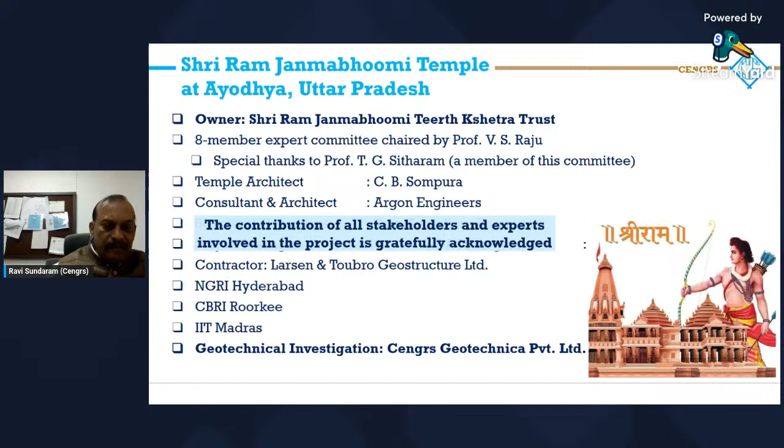So all the stakeholders, the experts, and others involved in the project, I gratefully acknowledge their contributions.

Just a brief introduction on what this presentation will include: the history, the legal cases, and the temple as planned, and the architectural principles involved here. The geotechnical investigations and geophysical investigations—that's the main thrust of this presentation. I'll be talking primarily about this.

It will also contain the test results, what tests were done and what the results were, the geotechnical design profile, the liquefaction analysis, the expected behavior of the temple during earthquakes, various foundation alternatives which were evaluated, and what was the final foundation system selected, and why we opted for this kind of foundation system.

We'll talk about the excavation, the engineered fill, the quality assurance, and how the structure was assembled. I will also, towards the end, speak a little bit about the archaeological findings, and then we conclude.

Brief history of the project site, the Ram Janmabhoomi Babri Masjid site: the site of the Ram Janmabhoomi land, the associated court cases, and the final selection of the site for the Shri Ram temple. This is a complex and deeply intertwined narrative of religion, politics, culture, and Indian law.

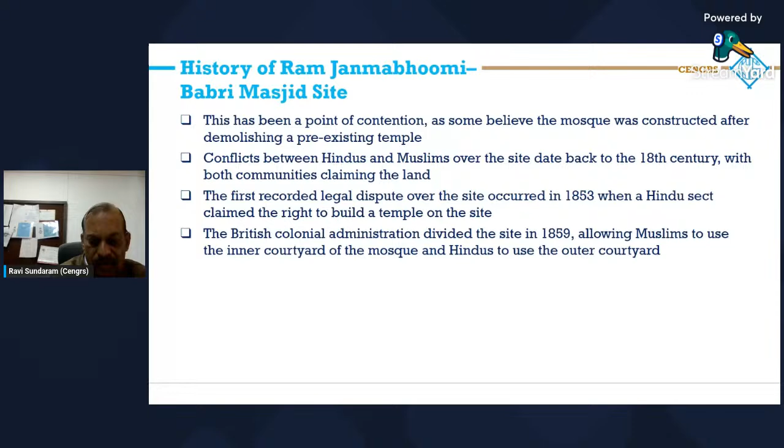Now, the court cases and the developments that took place: in 1949-50, idols of Lord Ram were placed inside the mosque, leading to both Hindu and Muslim protests. The government declared the site as disputed, and locked the gates, allowing worship only from outside. In 1950, Gopal Singh Visharad filed a suit seeking rights to worship the idols.

Then there was this Mahant Paramahansa Ramachandra Das. He filed another suit for continuation of puja and for removal of the idols.

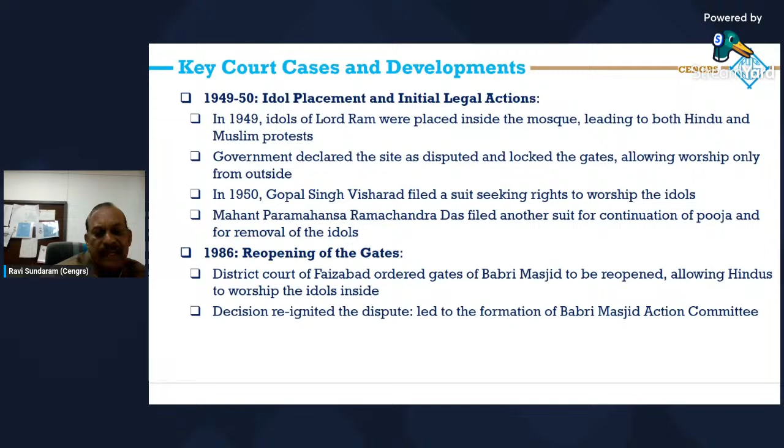In 1986, the whole thing was split open with the reopening of the gates. District Court of Faizabad ordered the gates of Babri Masjid to be opened, allowing Hindus to worship the idols inside. The decision reignited the dispute, and led to the formation of the Babri Masjid Action Committee.

In 1989, the Vishwa Hindu Parishad's activities also increased and the legal battles intensified. This led to a nationwide movement to build a temple at this site.

Another suit was filed on behalf of Lord Ram, basically Ram Virajman, by a VHP-backed organization seeking title to the disputed land.

In 1992, on December 6th, a large crowd of activists collected there. A big rally took place by VHP and BJP. They demolished the Babri Masjid.

This led to widespread communal riots across India, resulting in the deaths of thousands of people. Post-demolition, there were legal proceedings, numerous cases, including criminal charges against political leaders and activists. The site remained disputed, and the courts took control of the land.

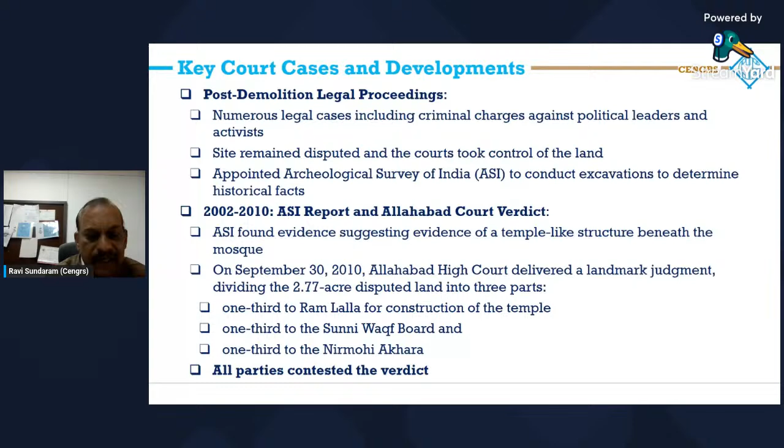So then the matter went to the Supreme Court, and you are all aware that in 2019, on November 19th, the Supreme Court of India delivered its final judgment in the matter.

The court unanimously awarded the entire disputed land to the deity Ram Lalla, represented by the Hindu parties, for construction of the temple. The court also directed the government to provide an alternative 5-acre land to the Sunni Waqf Board for construction of the mosque.

So with this, all the disputes were over and the activities related to the construction of the Shri Ram Temple started. So the Shri Ram Janmabhoomi Teerth Kshetra Trust was established to oversee the construction of the temple. The foundation stone for the temple was laid...

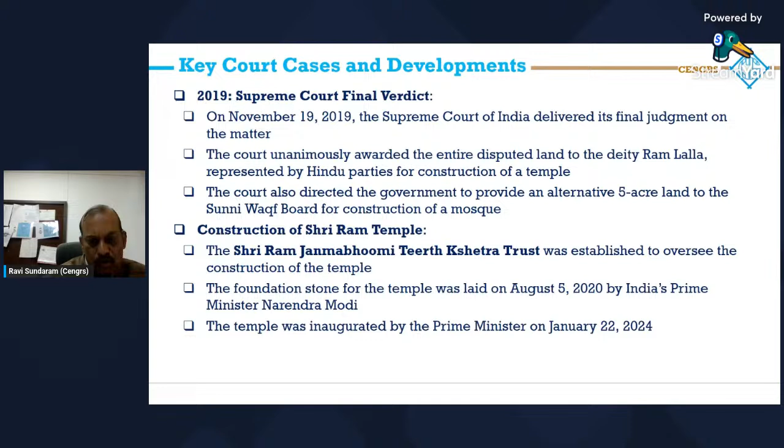...on August 5th by the Prime Minister, and then it was inaugurated again by the Prime Minister on January 22nd, 2024, that is last year.

So now we go to what was planned. Now with all the history and the court cases behind us, I'd like to explain what was planned, how it was executed, the engineering behind the structure, how it got constructed, and what we see today.

So the temple is basically planned as a masonry load-bearing structure. It is planned to last for nearly 1,000 years. The temple architect required that steel shall not be used in the construction, as per the ancient Vastu and Shilpa Shastras of temple construction. Some religious scriptures also advise that temple structures be constructed without using steel, for various practical reasons.

Hindu temple architecture, based on ancient texts, described the various principles of design, layout, measurement, ground preparation, and spatial geometry. So the design is rooted in the classical principles of Indian architecture, drawing from the Nagara style, which is prominent in most of North India.

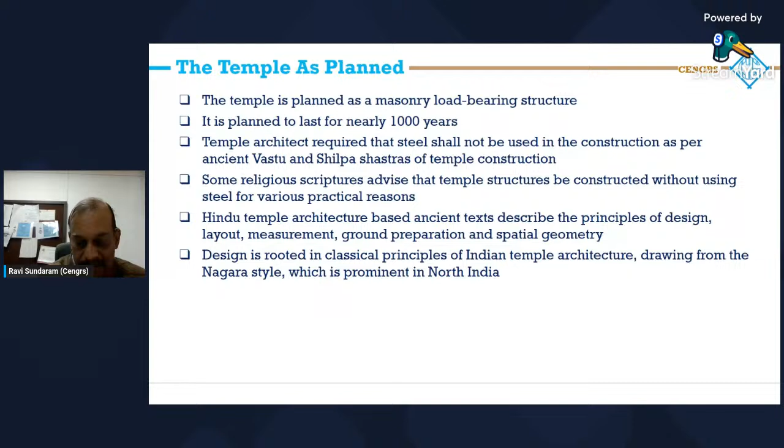So let's look at Ayodhya, situated on the banks of the river Sarayu, which is also called Ghagra River. It is the headquarters of Ayodhya district. Earlier it was part of the Faizabad district. Now it has been split into two districts, with Ayodhya being made a new district. So that is where the temple is located in Ayodhya.

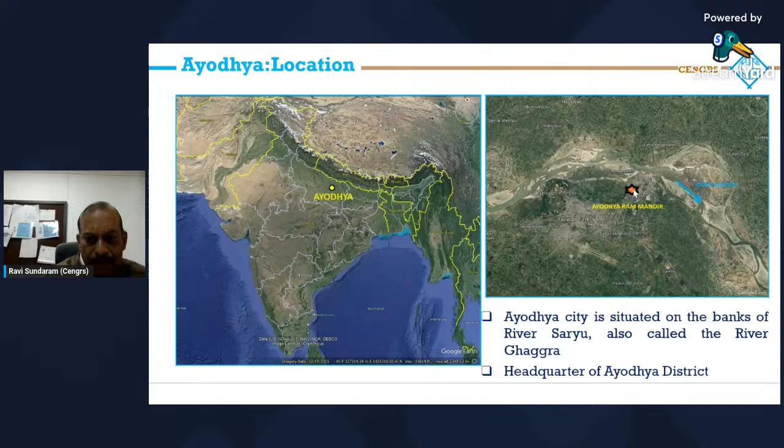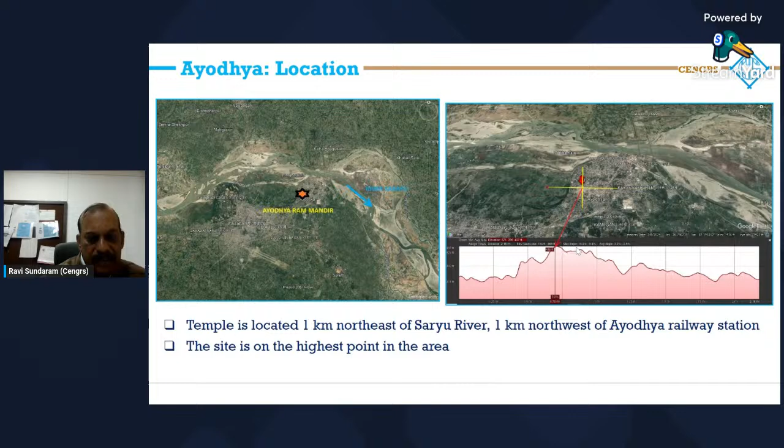It is about 1 kilometer northeast of the Sarayu River, and also 1 kilometer northwest of Ayodhya railway station. As you can see here, the temple site is on the highest point in the area.

So let's look at this temple's details. The plot covers nearly 67.7 acres. The main temple is built over 2.77 acres. The built dimensions are 115.8 meters by 76.2 meters, that is 380 by 250 feet. The development here includes the Garbhagriha, which is the most sacred part of the temple, which has the statue of Ram Lalla. The highest dome is 161 feet.

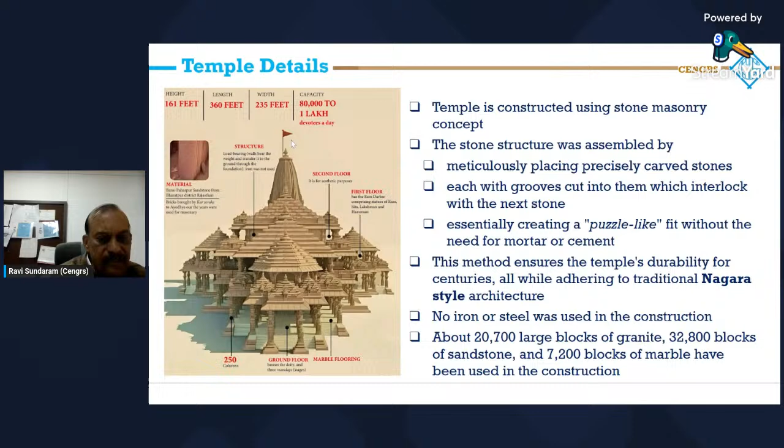So you can see here on the ground floor you have the main statue. On the first floor there is a Ram Darbar, and then there is a second floor. So this is how the structure looks like.

For protection against ground moisture, a 21 feet high plinth was constructed with granite. The foundation is flexible and can accommodate some movement during earthquakes. The roofs and pillars are stacked in such a way that their centers of gravity are perfectly aligned, so it's basically the enormous weight of the structure which holds it in place.

Traditional construction methods, materials, and age-old building practices have been used, but of course modern technology has also been used for the construction activity. Steel has not been used for construction. Stone has a longer lifespan and better durability in comparison to reinforced concrete, which is why concrete was not used. Also, stone shall enhance the structure's earthquake resistance.

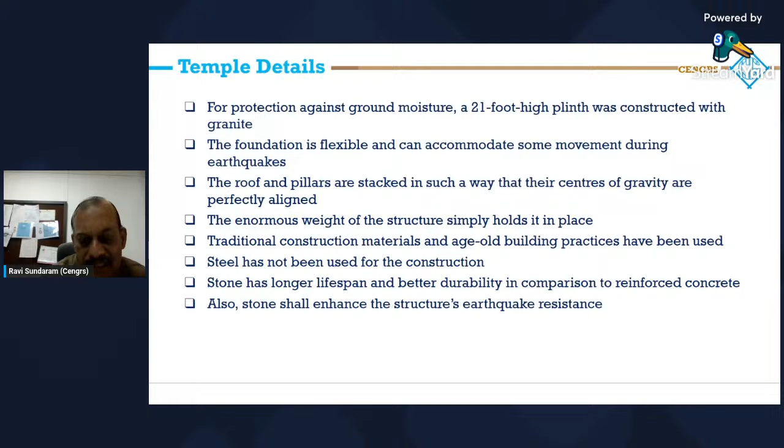Now we go into the geology and geomorphology of the area. This is the temple relative to the Saryu River, within the Indo-Gangetic alluvium. The whole area is part of the Indo-Gangetic alluvium. As you know, the Saryu goes and joins the Ganga, so it is located in the floodplains of the Saryu River. Basically, Faizabad district and Ayodhya district are all part of the central Gangetic plains.

So a thick pile of alluvial deposits of quaternary age, maybe between 1 million years and 10 to 15,000 years - this is the period during which the deposition took place. The alluvium consists of unconsolidated sediments of clay, silt, kankar, and sand, all recent deposits less than 1 million years old.

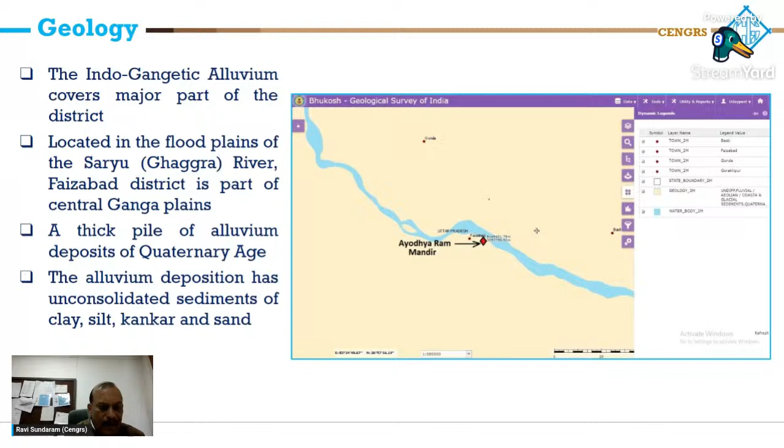The Saryu River has a large floodplain with several mid-channel bars. The channels are meandering, and multiple scars are present within the floodplain. The temple, of course, is located at the highest point here. Adjacent to the temple, there's a cut-off bank and an abandoned meander of the Saryu River. There's also a natural depression, or paleo channel as it is called, near the temple site.

Now I go briefly into the geophysical investigations. Will not take too much time on the geophysical. We'll go more into the geotechnical aspects.

Geophysical investigations conducted include ground penetrating radar, electrical resistivity tomography, MASW tests, and micro tremor study. NGRI had done most of these studies, and CBRI had also done some studies.

The ground penetrating radar identified a buried wall right at the location of the garbhagriha. Then these are all these various soil depositions in the temple zone. You can see here that this top layer is where there were a lot of artifacts found.

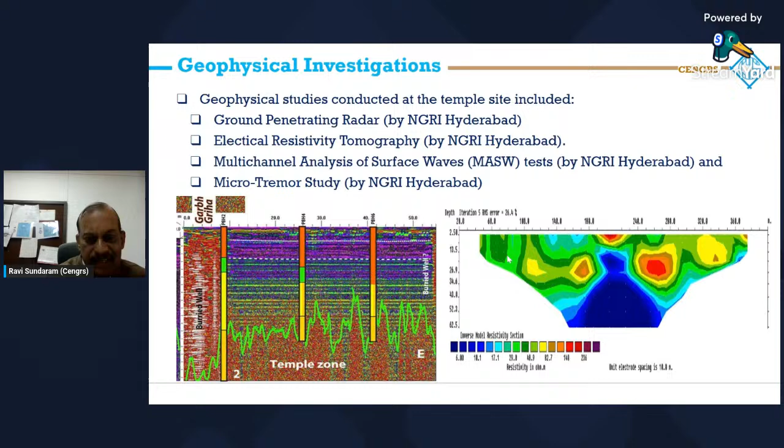Similarly, this is the electrical resistivity tomography. All these different colors which you see here are locations where they did find a lot of some of the artifacts.

The MASW study basically found the top layer of dumped material with mixture of man-made materials. There was a water saturated zone here, and then there was the sands of different compaction levels. So the shear wave velocities measured here were used to determine how hard the soils are, and also a paleo channel was identified.

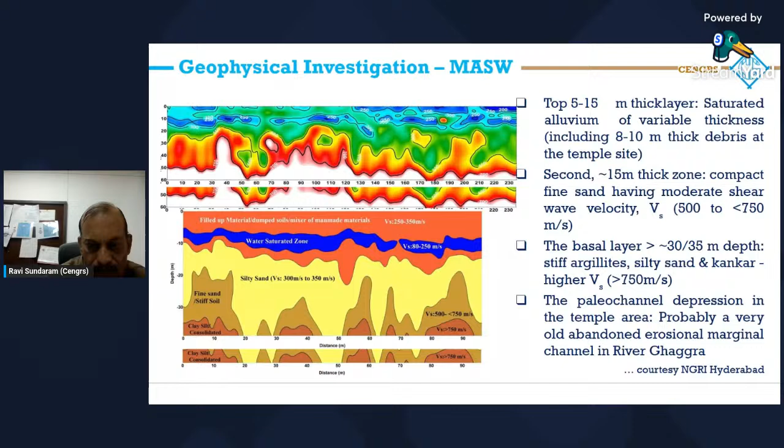So all this is mostly courtesy NGRI Hyderabad. Now I move on to the geotechnical investigation.

As some of you may be aware, the purpose of the investigation is to identify the stratigraphy or the soil conditions to substantial depth below the ground, particularly the garbhagriha, the various mandaps and other structures. Get an assessment of the soil resistance using a standard penetration test, determine the engineering properties of the soil, perform the soil bearing capacity and settlement analysis, evaluate the potential for liquefaction during earthquakes, and provide the engineering data for assessing the various possible foundation schemes so that you can select the appropriate one.

So the locations of the investigation are selected dependent on the structural loading. The garbhagriha is the tallest dome with the heaviest loads, so maximum investigation was done there. Similarly, for the various mandaps, depending on the loading, the scope was decided. So that's a plan of the investigation, I'll go more into this.

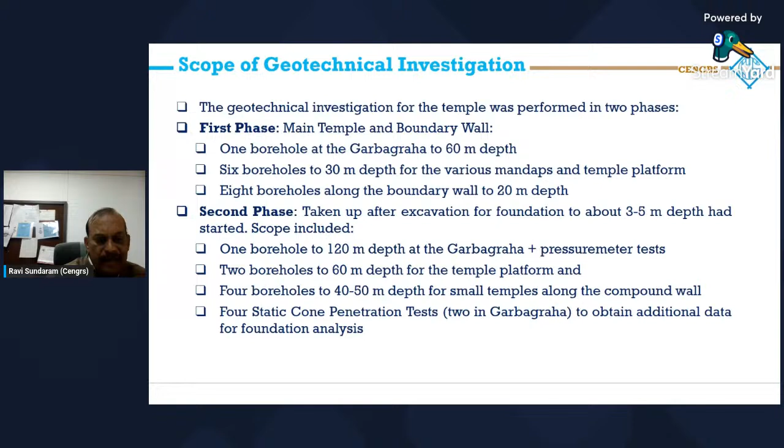So Ayodhya, as I told you earlier, is in the Indo-Gangetic alluvium. Now the superficial fill extends to 7 to 8 meter depth. Then below that you have sand, silty sand with minor layers of sandy silt. The fill contains basically silty sand with stones, brickbats, and all that. And at deeper depths, a few small pieces of pottery were also encountered.

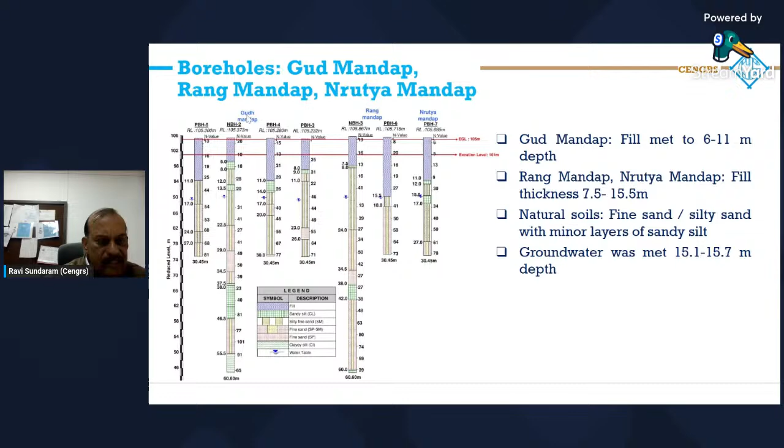Now this is the Gud-Mandap, Rang-Mandap, and the Nritya-Mandap. Here also we had boreholes down to a maximum 60 meter depth. The stratigraphy is similar, with fill thickness ranging from 7.5 to 15 meters. You can see here the fill thickness was more. Again, groundwater was at 15.1 to 15.7 meter depth.

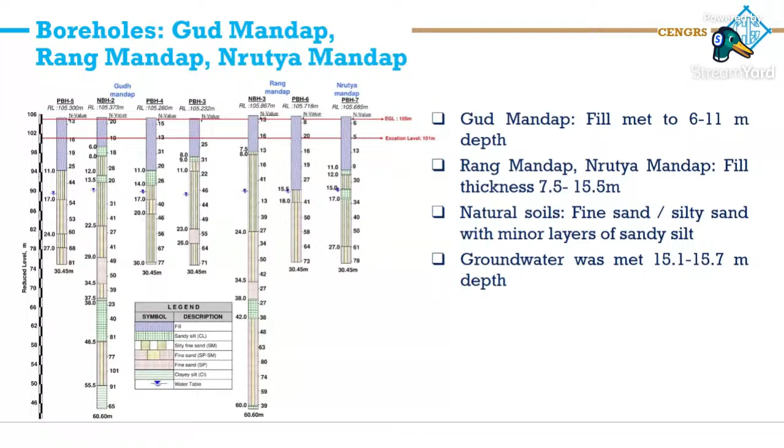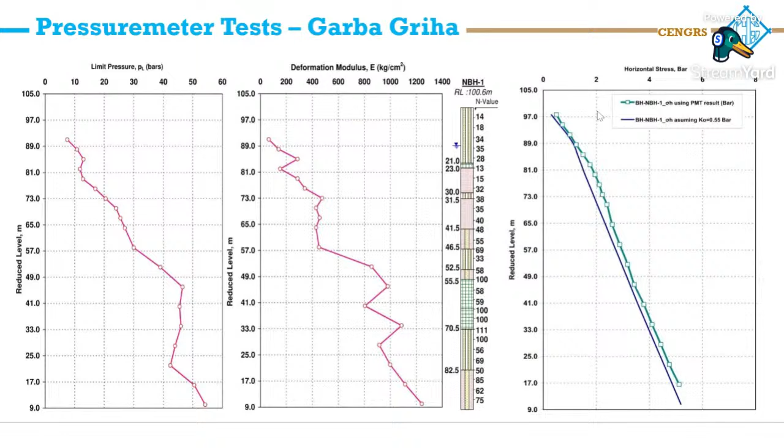So this is the pressure meter test being done at Ayodhya. The pressure meter gives you pressure versus volume change. This is the limit pressure and deformation modulus profile with depth, and you can see the horizontal stress with depth. These are results of the static cone penetration tests.

This was done from the excavated level here, at the Garbhagriha. The cone resistance gives you an indication of how compact the soil is. The test was done to about 40 meter depth. There was the fill and then the sand, as interpreted from this friction ratio and the cone tip resistance.

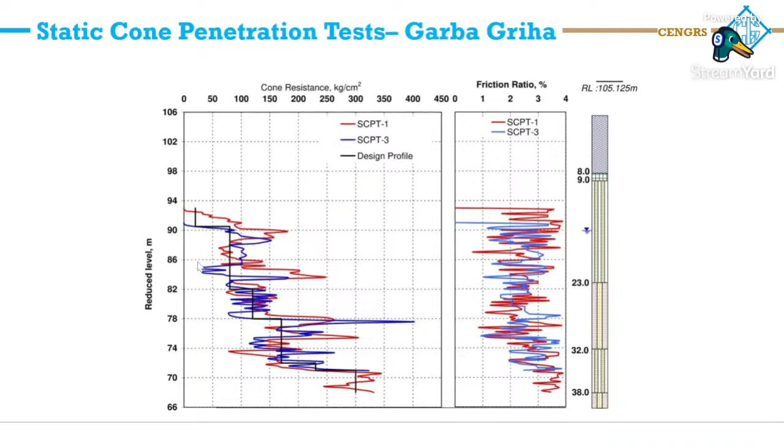At the Garbhagriha, we can interpret various engineering properties from the cone penetration tests. We used Robertson's correlations to assess the SPT values, bulk density, and various other parameters.

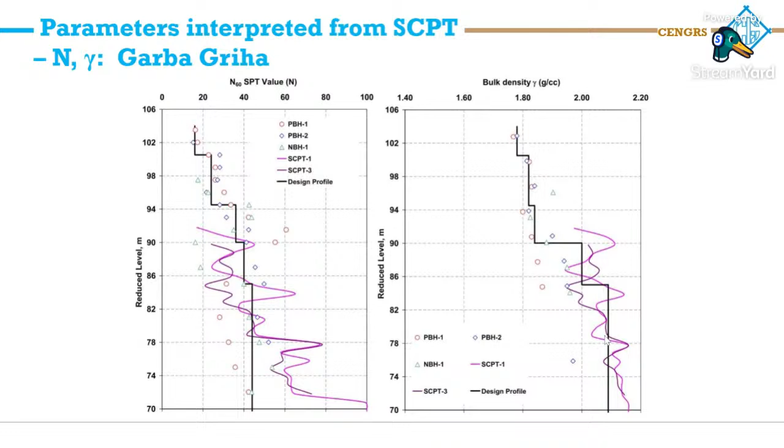So you can see what these show you: the measured values of SPT N in the boreholes, and these are the interpreted values from the cone penetration data, and this one is the design profile used for our analysis. Same way for the density of the soil, these symbols show what was measured in the boreholes, and we have the cone data, the interpreted density values, and the design profile.

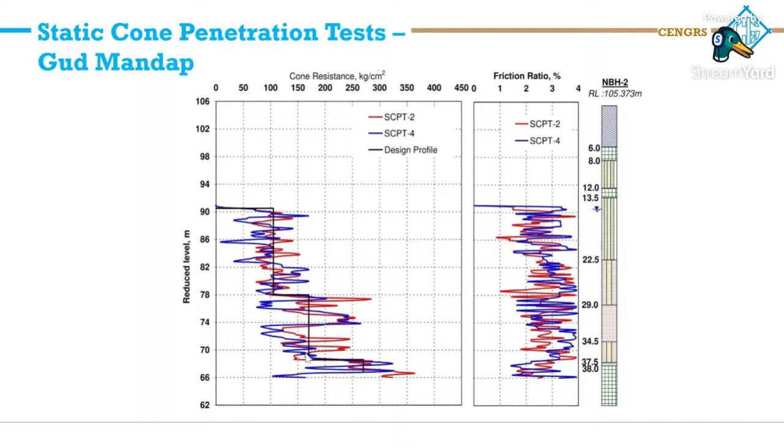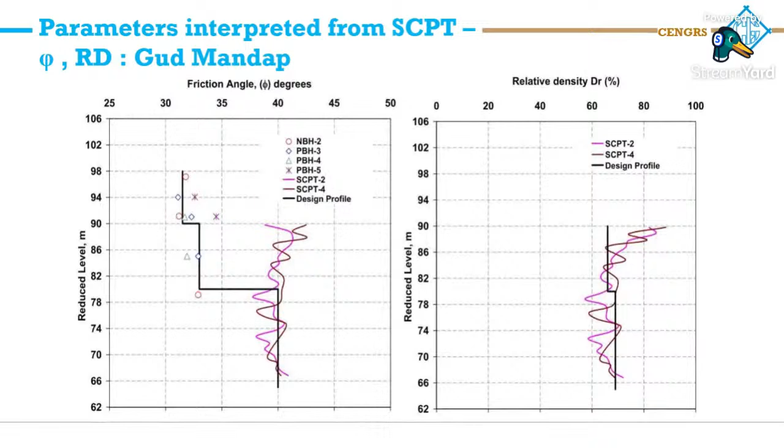We also measured the angle of internal friction and the relative density interpreted from the cone data. This is the same kind of correlation for the Gud-Mandap. Here also we had done cone penetration tests, and you can see there was a 6 meter fill, then sand below, and around 38 meters there was a silt layer. This is the design profile of QC, cone tip resistance, and various engineering parameters from Robertson's correlations: the SPT values, bulk density, friction angle, and relative density.

Modulus of elasticity is another very important parameter, and a little difficult to assess. The best correlations are available from CPT and pressure meter tests. Looking at all these, the design profile for modulus of elasticity has been selected for the different areas, and using all this, the geotechnical design profile has been selected.

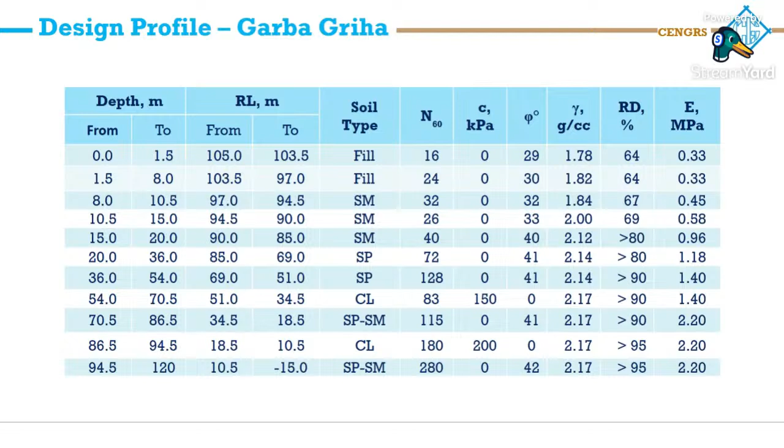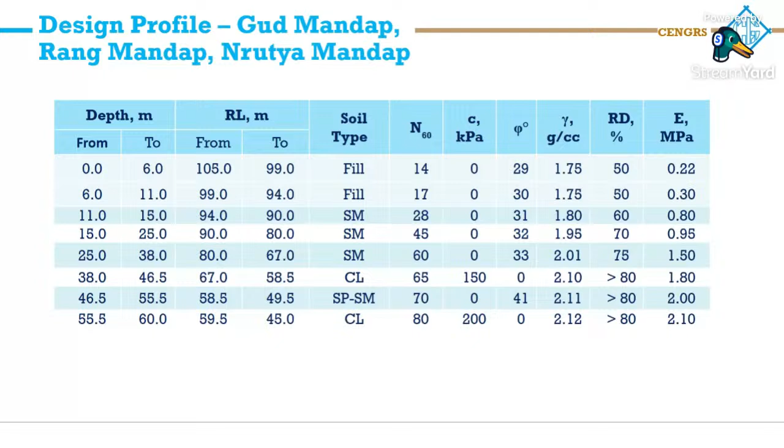So this is the geotechnical design profile for one area, and this is the geotechnical design profile for the others. You can see the various parameters which have been selected for the foundation analysis.

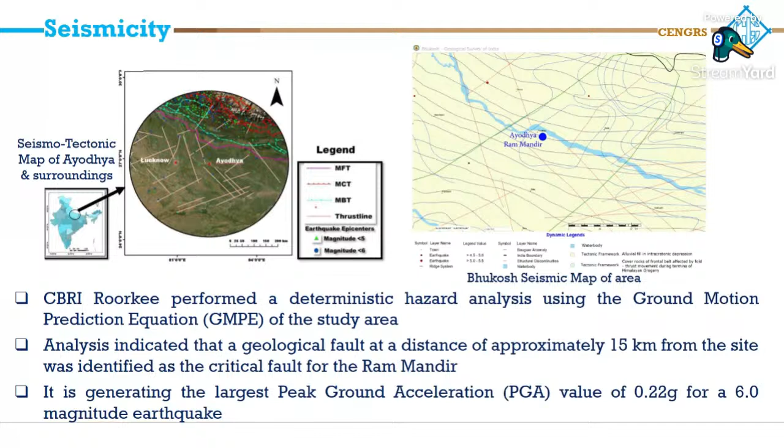The analysis indicated that a geological fault at a distance of approximately 15 kilometers from the site is the critical fault for the Ram Mandir. It generates a largest peak ground acceleration of 0.22 G for an earthquake magnitude of 6.0 on the Richter scale. So we also considered the possibility of liquefaction during earthquakes, when the soil tends to behave like a liquid.

This was done as per IS code, IS 1893/2016, which divides the whole of India into 5 seismic zones. Ayodhya actually falls just at the boundary of zone 3 and zone 4. Most designers consider it zone 3 because it falls just inside the zone 3 area, but considering the importance of this structure, the analysis was done treating it as earthquake zone 4.

The design earthquake magnitude was taken as 6.5 on the Richter scale, and the peak ground acceleration was taken as 0.24 G. The design groundwater level was taken as the HFL of the Sarayu River, that is 11 meter depth. The results of the analysis prove that liquefaction is not likely to occur during the design earthquake.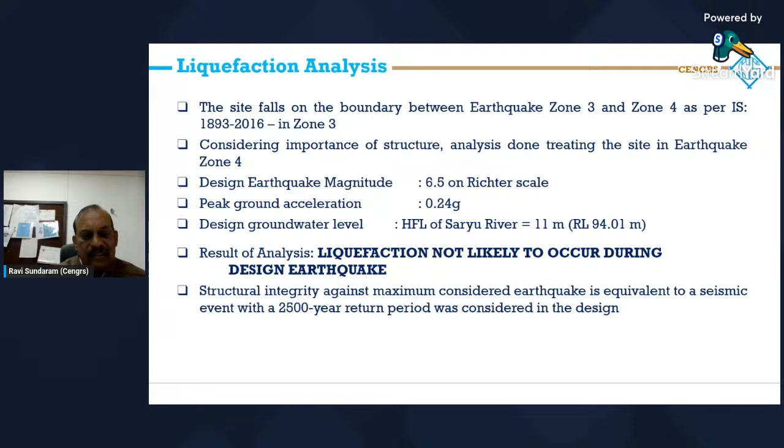We also checked structural integrity against the maximum considered earthquake. This is equivalent to a seismic event with a 2,500 year return period. So this is what has been considered in the design.

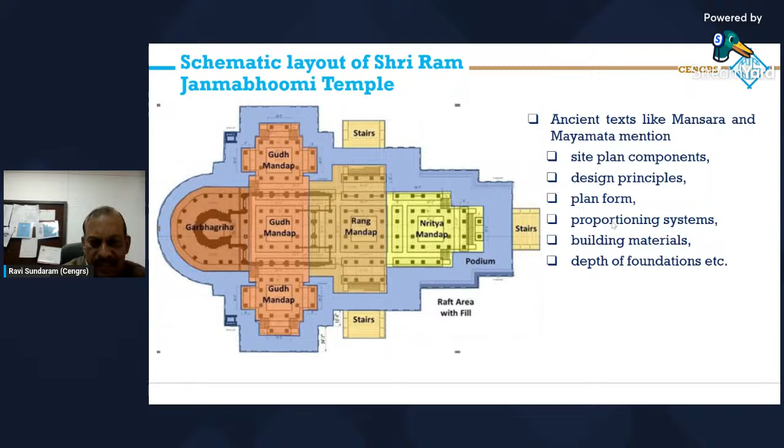Let's get into the layout. So this is the layout of the different mandaps, all based on ancient texts like Mansara and Mayamata. They mention the site plan components, design principles, plan form, proportioning systems, building materials to be used, depth of foundation, etc.

Many of the ancient temples have also been designed on these principles. I'll just name a few: the Brahadishwara temple in Thanjavur, Tamil Nadu; the Jagannath temple in Puri, Odisha; and also the Khajuraho temple — all these have been built with the same principles given in this configuration here.

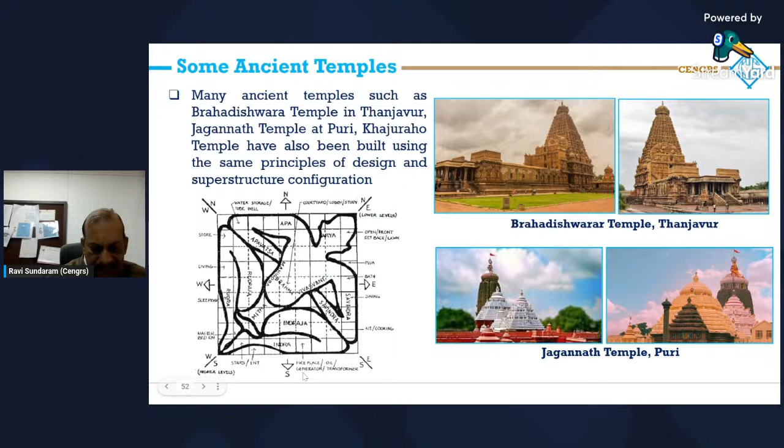392 pillars on the ground floor... total 392 pillars, 160 on the ground floor and 132 on the first floor.

So you can see the various units here. Let's look at the foundation loads. The Garbhagriha, the foundation depth was around 7.64 meters, area is 576 square meters, and the total loading intensity is as high as 380 kPa.

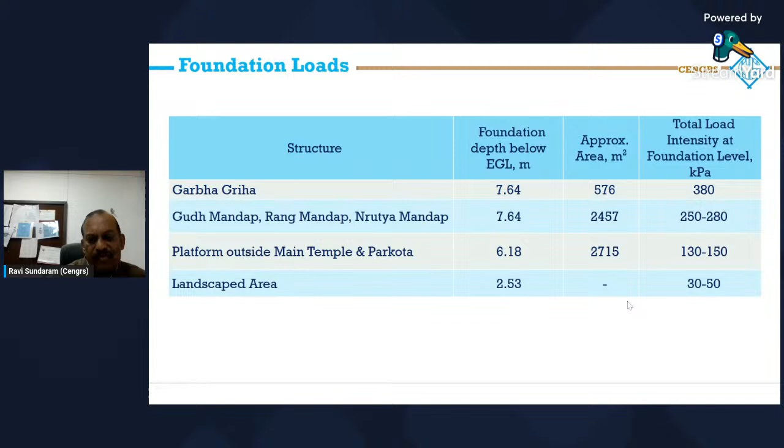In the Gudh Mandap, Rang Mandap and Nrutya Mandap, somewhat lower intensity, but still very high, 250 to 280. The platform area outside the main temple and the Parkota, the boundary wall, the pressure ranges 130 to 150 kPa. The landscape area is lightly loaded, 30 to 50 kPa. So this is the loads on the temple structure for the various facilities.

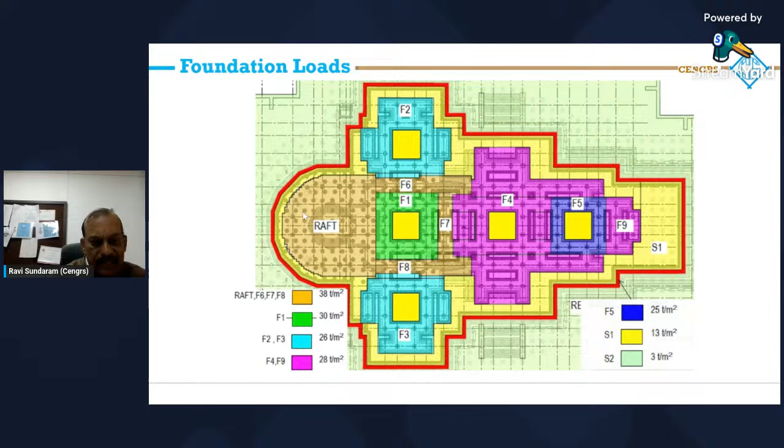What is the design criteria that's most important? The main thing was that design life is to be taken as 1,000 years. As you know, most modern buildings take design life between 50 and 100 years, so going to 1,000 years is a huge change.

The important requirements for the foundation design are, firstly, the differential settlement the structure cannot tolerate, because we are not using steel and it's a stone masonry structure. So differential settlement has to be close to zero. To minimize it, because any structure built will cause the ground to settle, total settlement is prescribed as 12 mm, so the differential settlement we were hoping will be much less than 4 to 5 mm.

And this much the structure should be able to tolerate. So you ensure safe load transfer of the superstructure loads to the foundation - vertical downward, upward, and horizontal loads, particularly during seismic events. Ensure durability of the foundation material against effects of weathering and impacts of underground water currents. So the foundation shall withstand the wind loads and the seismicity of the area. This is the design criteria.

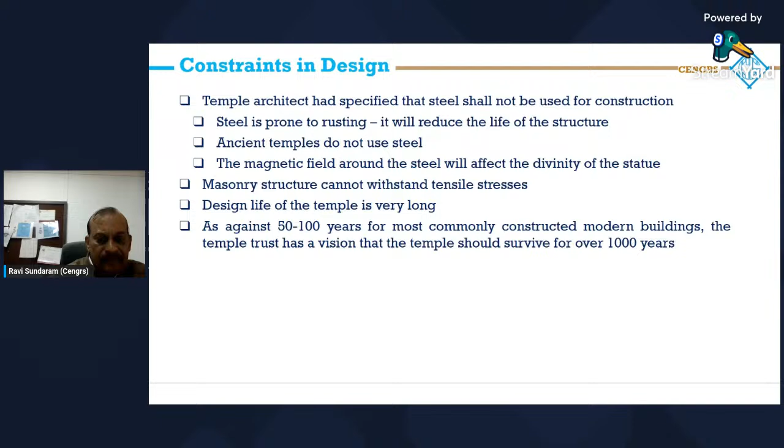So what were the foundation alternatives considered? Let's have a look at this. Several alternatives were proposed by various experts. So the first one, of course...

The raft foundation bearing on the soil at shallow depth, but because there is a substantial thickness of fill, and the compaction and thickness of the fill varies from location to location, total and differential settlements would be large. You cannot control the relative movement, so this option was not feasible and was rejected right at the start.

The second was raft foundation supported by piles - a hybrid pile raft foundation together with a diaphragm wall for confinement. What the diaphragm wall will do is help restrict the differential settlement. This is a very reliable and safe foundation system used for various modern tall buildings, and it will also ensure total and differential settlements are within limits.

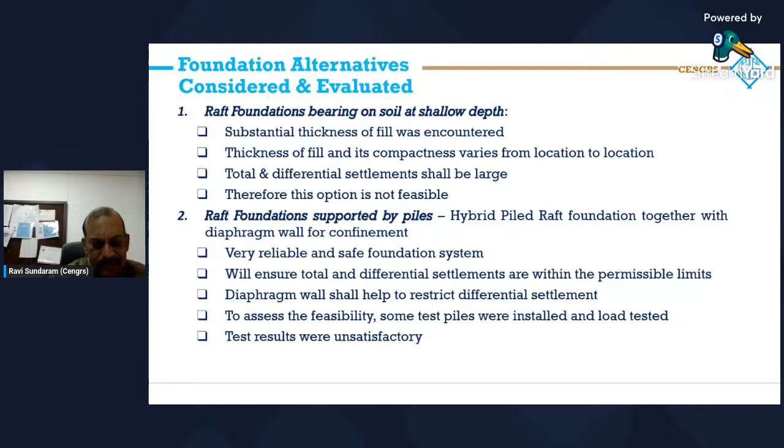So to make this assessment, some test piles were installed and load tested for vertical loads as well as horizontal loads. While the piles themselves passed, there were some questions on the integrity of the piles from the pile integrity tests, so it was decided that it's unsatisfactory and risky.

Raft foundations can be supported on jet grouted columns. High pressured jet grouting can strengthen the soils effectively and restrict settlement. It's a viable option, particularly for high bearing pressure and stringent settlement restrictions. By varying the spacing between the jet grouted columns in areas with different loading intensities, total and differential settlement can be controlled.

Raft foundation supported on vibro columns was another option proposed. Vibro stone columns are a very reliable foundation scheme. Stone columns 600 to 800 mm diameter could penetrate into the fill, and you can seat it on the dense soils with SPT value of 40 to 50, requiring about 17 to 19 meters below ground level.

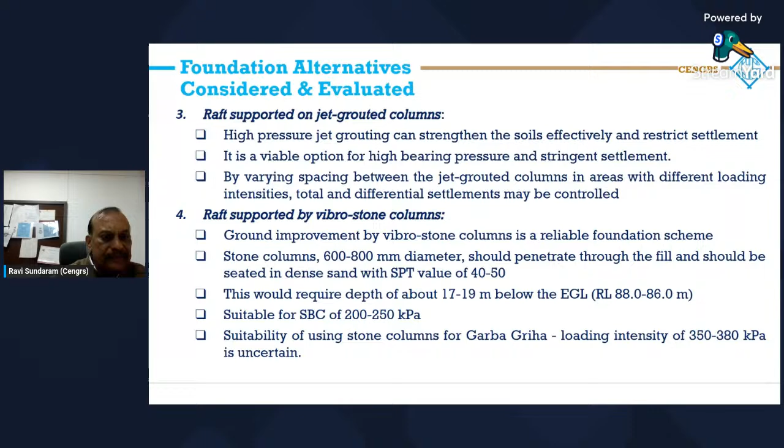It's suitable for bearing capacity of up to 200 to 250 kPa. But because the Garbhagriha loading is 350 to 380 kPa, it is uncertain. Load tests will have to be done to prove it. So there was a little concern on whether it is suitable or not.

The last option is open excavation to 12-meter depth with engineered backfill, which is the general thickness of the fill in most areas. In the Garbhagriha, it was carried out to 14 meters. Compact the soils with a vibro roller, then controlled engineered fill material may be placed in layers with thorough compaction, do load tests, and then construct the raft over it. The stress will be distributed over the compacted fill, so stresses in the soils below will be significantly less, and the supporting soil is dense sand. So the uncertain behavior of the fill is eliminated, and differential settlement will not occur.

So a little more detail about these various options. This is the hybrid raft and pile foundation. The concern is that since you cannot use steel, plain bored cast in situ piles were used. The option of using fiber-glass polymer reinforcement instead of steel reinforcement was evaluated, but not considered due to lack of availability and insufficient experience using such options. Both L&T and Tata Consulting Engineers preferred the use of piles.

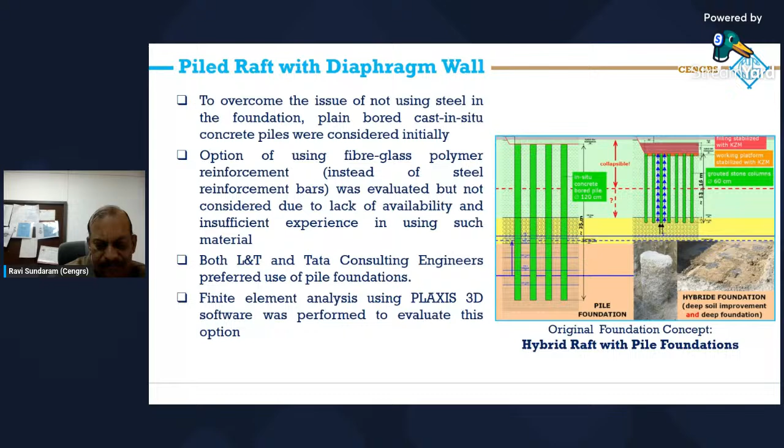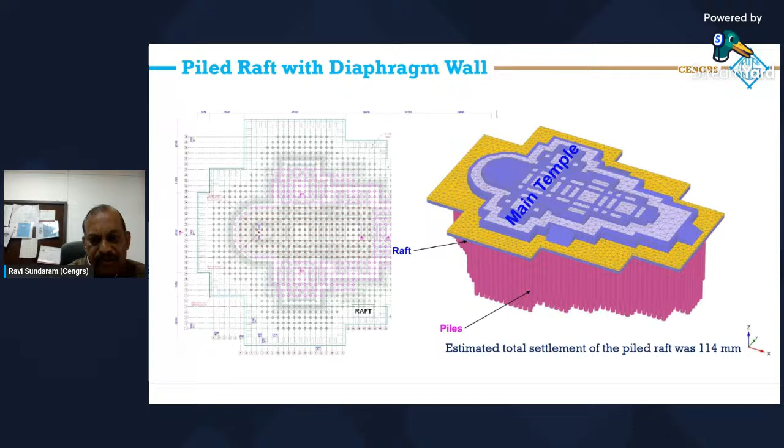Finite element analysis using Plaxis 3D software was performed to evaluate this option. This is the finite element analysis model which was analyzed. The estimated total settlement was quite large, about 114 mm, so this option was given up.

Vibro stone columns are a well-established, proven technology. Improvement will be done for the entire temple footprint plus 20 meters beyond the temple perimeter, so that peripheral restrainment is ensured. In situ full-scale trials plus in situ testing and footing load tests shall be done to establish the design parameters.

But vibro stone columns are not suitable for the Garbhagriha and Gud Mandap, since the loadings in this area are very high. The option of using stone columns outside the main temple for the Parkota and other areas was assessed, but after detailed evaluation, this option was also abandoned.

Jet grouting is the scheme in which you have a rig into which you pump a high velocity jet of cement slurry. This is mixed with the soil, rotated and pulled up gradually so that it forms the columns. High pressure jet grouting can strengthen the soils effectively and restrict settlement. It's a viable option for high bearing pressure, stringent settlement criteria for the dome of the Garbhagriha, and can be used for other structures also. The spacing between the jet grout columns can be optimized depending on the loading.

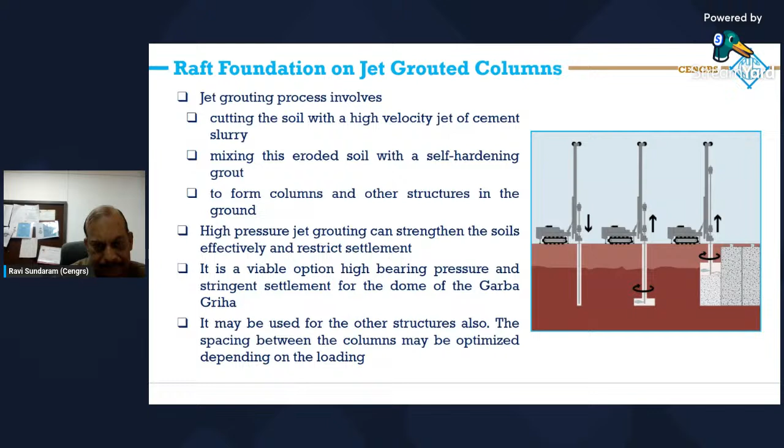So this is the scheme. As I told you, you would have to go down to around 19 meters depth or so. Over that you place a 500 to 800 mm thick granular blanket, and then a geogrid shall be placed above that to distribute the load. The benefit is versatility, adaptability, speed and effectiveness. The drawback is high cost, complexity, uncertainty and environmental impact. The concern was on the longevity of the cement columns and the kind of quality assurance required during construction, so the expert committee decided not to pursue this option.

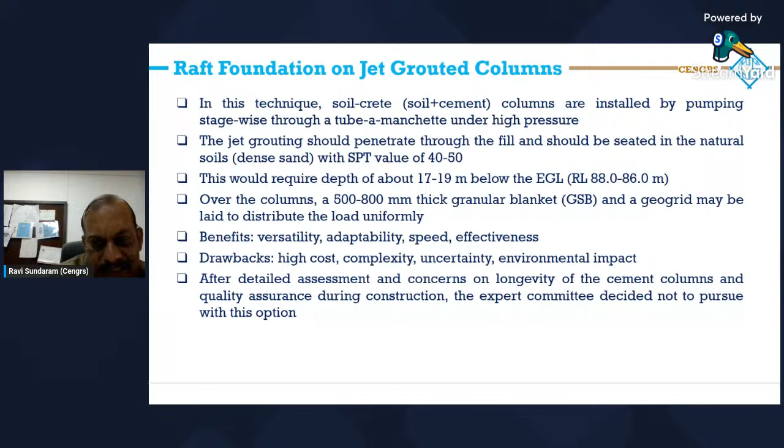So we come to the option which was actually adopted. After review of these various options, it was decided to excavate to 12 meter depth, 14 meters in the Garbhagriha area, place roller compacted concrete, and construct the foundation over the concrete base. The expert committee decided that an unreinforced single raft on the improved ground is preferable.

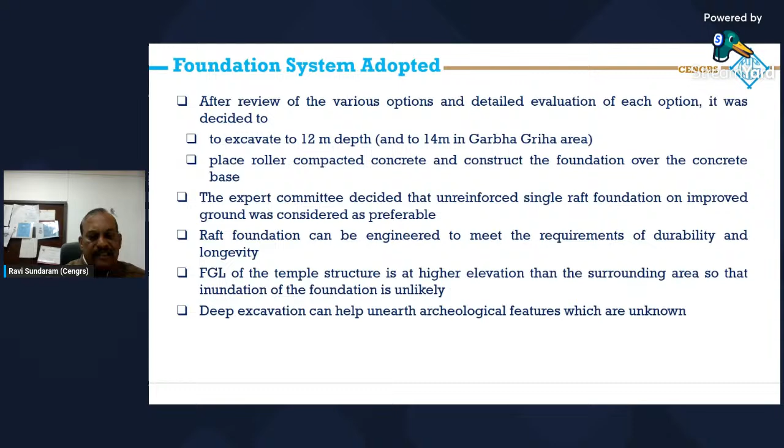The raft foundation can be engineered to meet the requirements of durability and longevity. The finished ground level of the temple is at a higher elevation than the surrounding ground, so inundation is unlikely. The deep excavation can also help unearth archaeological features which are not known. So the single integrated raft was the preferred option.

Sequential construction from high load intensity to low load intensity segments helps minimize the differential settlement and optimize the performance of the foundation and the superstructure. This scheme was justified taking into account the ground conditions, the structural and serviceability requirements of the building, and economic factors, both time and cost.

The main thing was that it will provide an opportunity to look at the actual material below the foundation and take decisions as the work proceeds. It also provides an opportunity for the archaeologists to make a detailed assessment and determine whether an ancient temple exists or not. Such an opportunity to identify the older structure would have been lost to posterity if any of the other options had been selected.

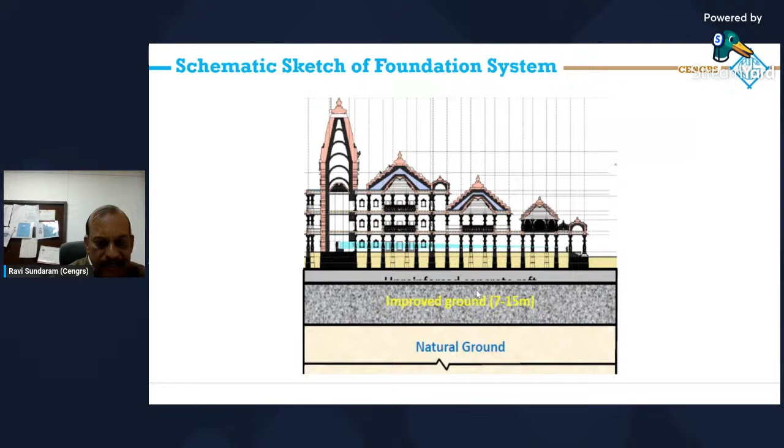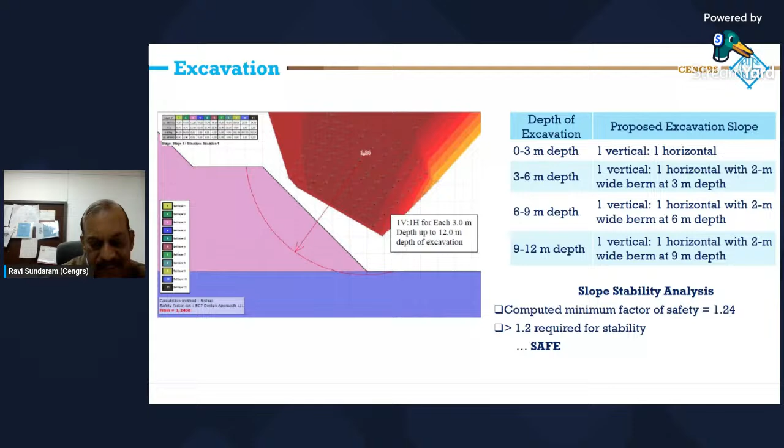Slope stability analysis showed the factor of safety of 1.24. For temporary excavation, 1.2 is normally considered safe. So this excavation scheme is safe for the structure.

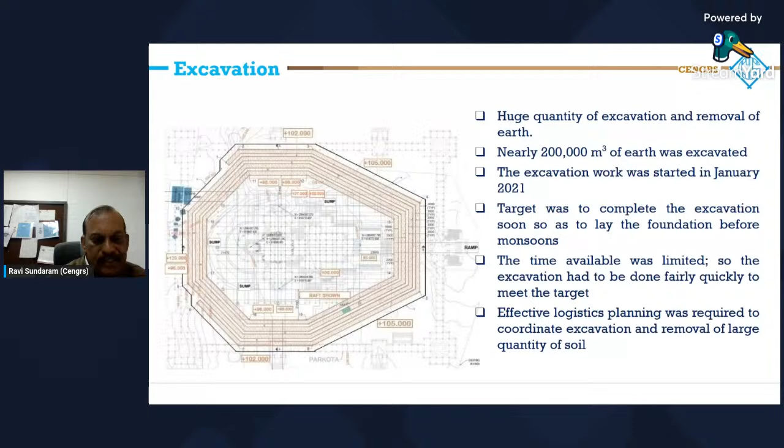Then is the engineered fill, which was used. IIT Madras experts were consulted, and they advised that the engineered fill should have soft rock-like characteristics. So the options that were considered were well-graded, compacted, granular fill, well-graded, cementitious, compacted, granular fill, and roller compacted concrete. Roller compacted concrete, or RCC, was the preferred option by the expert committee, since its engineering characteristics can be specified and controlled, and a uniform, consistent quality can be ensured.

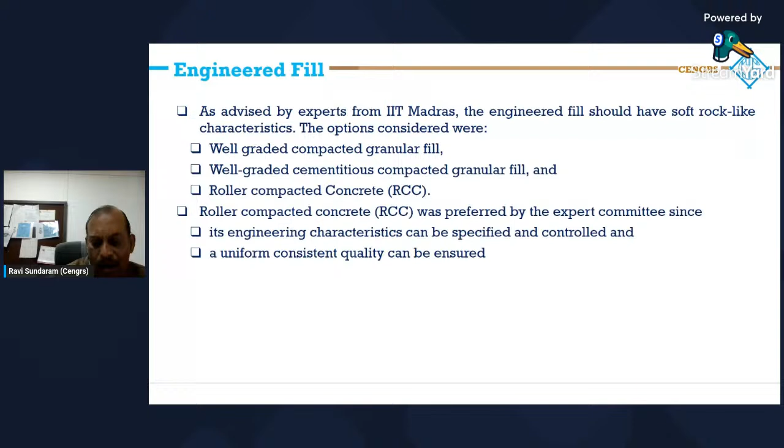Roller compacted concrete was designed and proportioned using locally sourced ingredients. 25 mm down stone aggregate was used. Portland cement was partially substituted by fly ash to limit the heat of hydration. This helps in reducing the thermal stresses during construction and limits the potential for formation of cracks. So the mix contains fly ash, coarse sand, stone aggregate, and low water cement ratio. The mix has almost no slump.

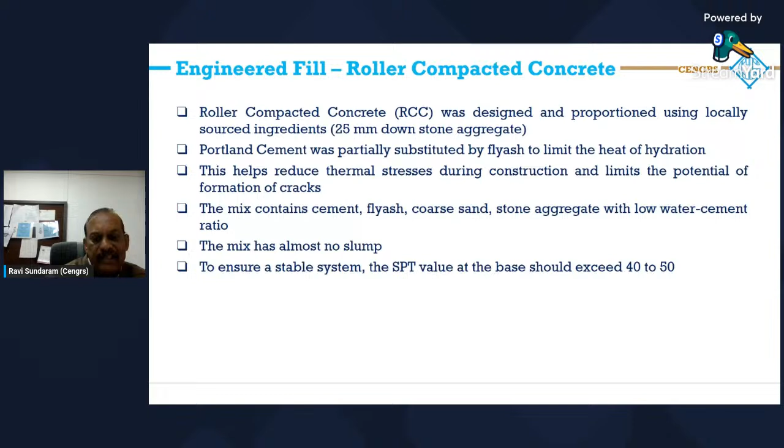To ensure a stable system, the SPT value at the base should exceed 40 to 50. So laboratory trials were made to establish the desired range of workability that helps to achieve the optimal density for the compacted concrete. The design values of compressive strength, lift joint bond strength, split tensile strength, elastic modulus - all these design values were selected, and tests were done to ensure that these properties are met.

The soil at the base of the roller compacted concrete should have an SPT value of more than 40. Field trials were performed, and 4 layers of concrete, each 150 mm thick, were placed and compacted thoroughly. Field density was measured using a nuclear density gauge. Concrete cores were then extracted to test the various engineering properties.

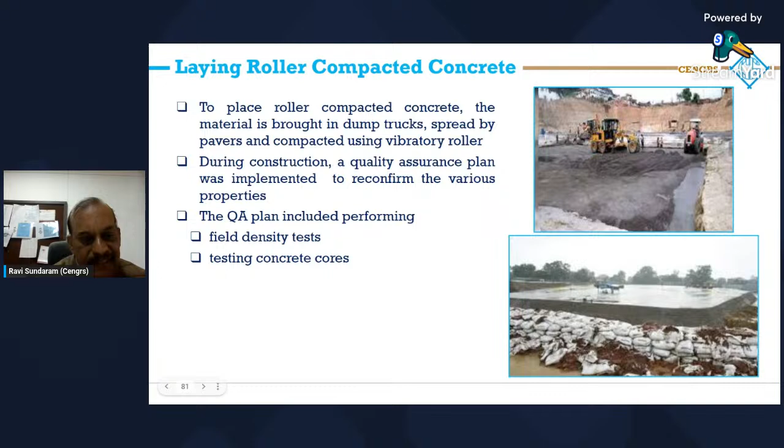To place the roller compacted concrete, material was brought in dump trucks, spread by pavers, and compacted using a vibratory roller. During construction, a quality assurance plan was implemented to reconfirm the various properties. These tests included field density tests and testing the concrete cores.

So the plinth was then constructed on top of this using 17,000 granite stones that were sourced from Karnataka and Andhra Pradesh. The stones were around 1.5 by 0.75 meter by 0.9 meter in size, and each weighed about 2.5 tons.

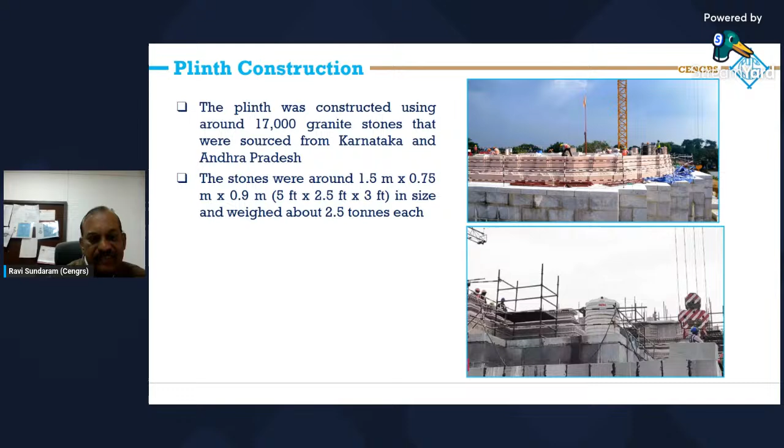Now let's talk about the foundation settlement. Since sand is encountered below the foundation level, settlement is expected to be immediate. So settlement shall progressively occur as the construction proceeds. Long-term settlement is not likely to occur. More than 80 to 90% settlement would have occurred as the construction proceeds. The structure therefore adjusts to the gradual settlement as the construction proceeds stage-wise.

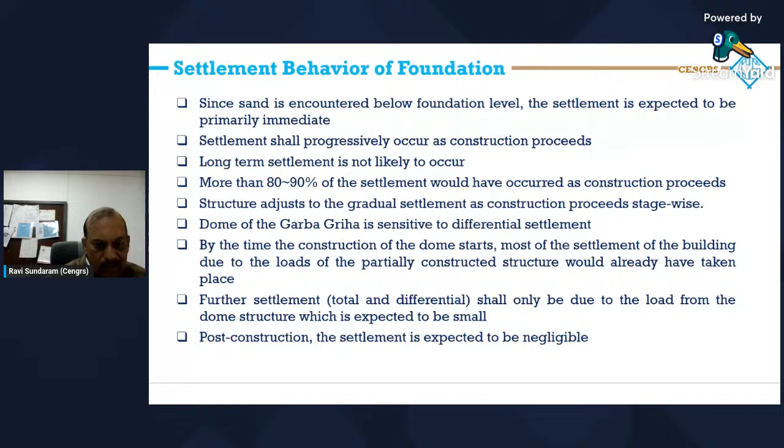The dome of the Garba Griha is what is sensitive to settlement. By the time construction of the dome starts, most of the settlement of the lower part of the building, due to the partially constructed structure, would already have taken place. Further, the total and differential settlement shall only be due to the dome structure, which is expected to be small. Post-construction, we expect the settlement to be negligible.

As per the records maintained, after a few months of construction of the temple, the measurements showed only 4 mm settlement. This confirmed what had been believed all along, that the differential settlement is very small, so the structure is safe. So they were quite satisfied that all the safety and functional requirements have been met. The structure may be deemed safe with insignificant settlement to occur in the coming years.

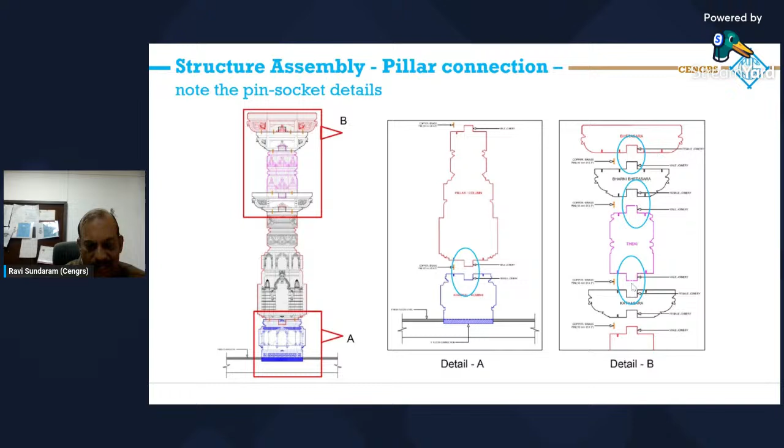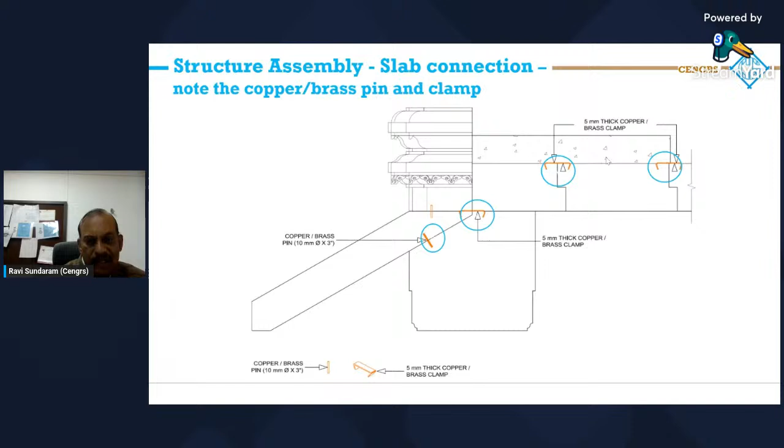Now let's talk about the timelines. Initial geotechnical investigation work was started in July 2020. Foundation stone was laid in August 2020. Excavation was started January to March 2021. The backfilling with engineered fill was done April to September 2021. The raft foundation with the granite blocks was done September to November 2021.

Then you had the plinth of granite slabs, November 2021 to March 2022. Temple superstructure construction started January 2022 and completed January 2024. The inauguration and consecration of the temple took place on 22nd January 2024.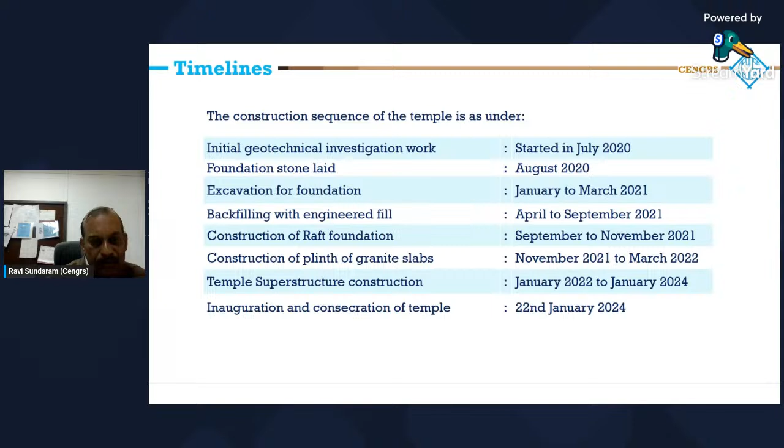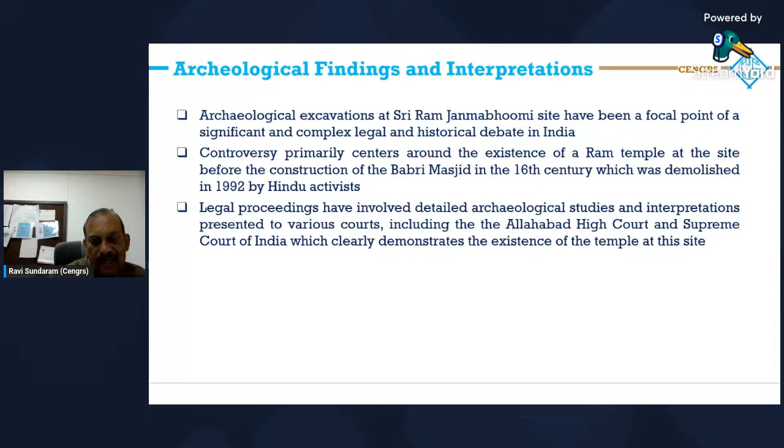Now a little bit about the archaeological findings and interpretations. Archaeological excavations at Shri Ram Janmabhoomi site have been a focal point of significant and complex legal and historical debate. Primarily, it centers around the existence of a Ram temple at this site before the construction of the Babri Masjid in the 16th century, which was demolished in 1992. Legal proceedings had involved various archaeological studies, and interpretations were presented to the courts, including the Allahabad High Court and Supreme Court of India, which clearly demonstrate the existence of an old temple at this site.

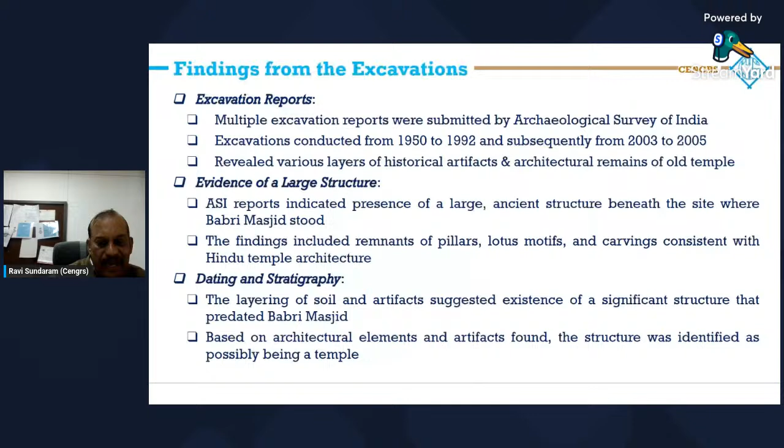So regarding the excavation reports, there were multiple reports submitted by the Archaeological Survey of India, right from 1950 to 1992, and then 2003 to 2005. It revealed various layers of historical artifacts. ASI reported the presence of a large ancient structure at the site where Babri Masjid stood. The findings included remnants of pillars, lotus motifs, and carvings consistent with Hindu temple architecture. Dating and stratigraphy was also done. The layering of the soil and artifacts suggested this significant structure predated Babri Masjid, and the architectural elements and artifacts proved that it was possibly identified to be a temple.

In 1990, the excavations suggested the remnants, but the findings were not conclusive. In 2003, which is most significant to this dispute, there were pillars and foundations, a series of pillar bases, suggesting the existence of a large structure, probably predating the Babri Masjid. The alignment and layout of these pillars indicated a substantial building, which some scholars and historians believe could have been a temple.

The findings from the excavations, when this huge excavation was done to 14-15 meter depth, included artifacts and architectural elements, including terracotta sculptures, religious motifs, and architectural fragments consistent with temple construction. Notably, a large slab with inscription in Devanagari script was also found, furthering the suggestion of a Hindu temple. Post holes and structural evidence proved that there is a possibility of a pre-existing structure. Pillars, temple fragments, lintels, and chhajjas, all these were provided as evidence to the court.

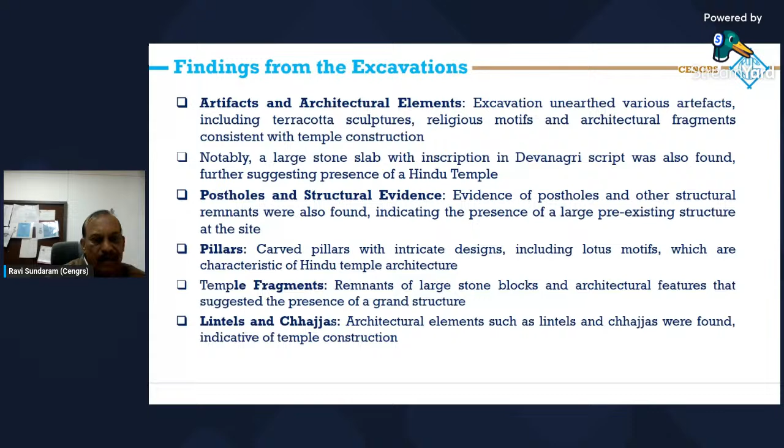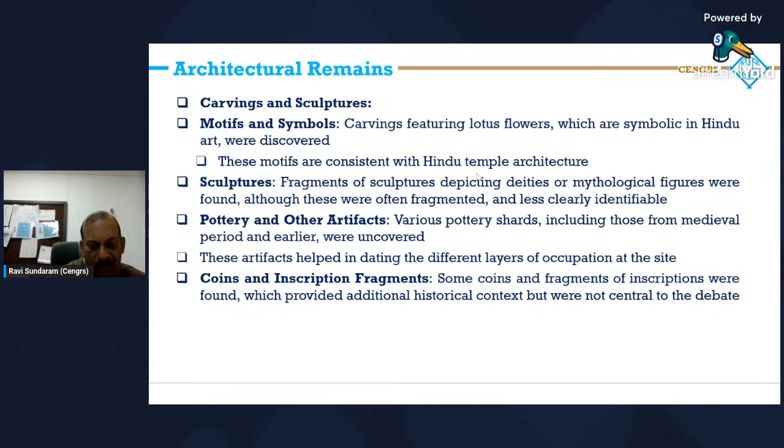Again, carvings and sculptures, motifs and symbols, pottery and other artifacts. There were also some coins and inscription fragments. All these are given in the report of the Archaeological Survey of India. Many of the architectural remains and pottery shards dated back to the medieval period, roughly around the 16th century, which corresponds to the time when Babri Masjid was constructed. But there were also some pre-medieval remains.

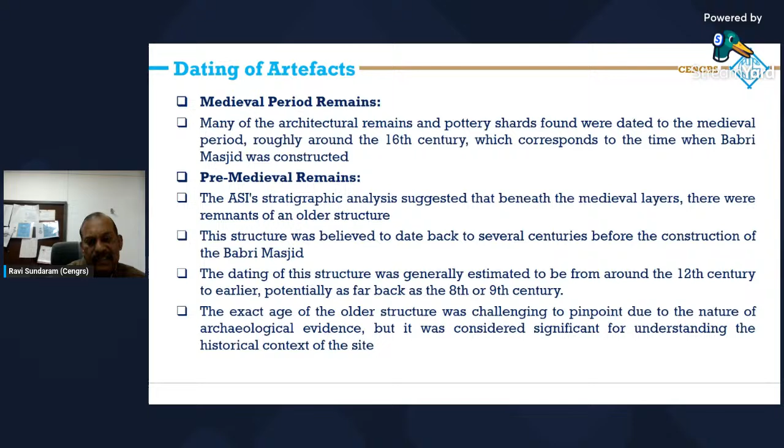Beneath these layers, there were remnants of an older structure, dating back several centuries before construction of the Babri Masjid. The dating of this structure was generally estimated to be from the 12th century or earlier, possibly as far back as the 8th or 9th century. There was also mention of a Ram Vishnu temple. The exact age of the old structure was challenging to pinpoint because of the nature of the archaeological evidence, but it was considered significant for understanding the historical context of the site. There were artifacts dating back to the 8th century, evidence of a Hindu temple, and complex layering.

Overall, the artifacts and dating provided crucial insights into the historical layers of the site, but did not offer conclusive evidence of the specific nature of the structure or its religious significance. The findings contributed to a broader understanding of the site's history, but the ultimate legal and cultural decision was based on a combination of historical evidence, religious significance, and legal considerations.

All these were correlated with the archaeological findings and the scientific investigation by NGRI and CBRI. This is what proved crucial, because the archaeological findings complemented the scientific studies.

The GPR survey indicated several anomalies in the subsurface layers, suggesting the presence of a large ancient structure beneath the site. Some of the data indicated possible walls, pillars, or other architectural elements consistent with a significant ancient structure. The electrical resistivity survey also corresponded to the presence of large man-made structures.

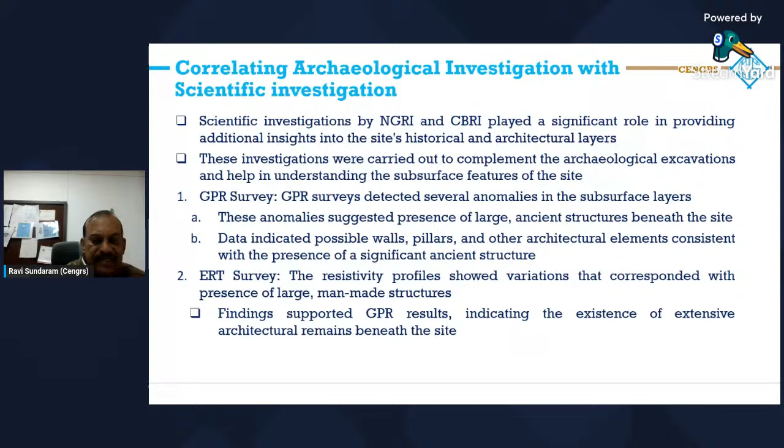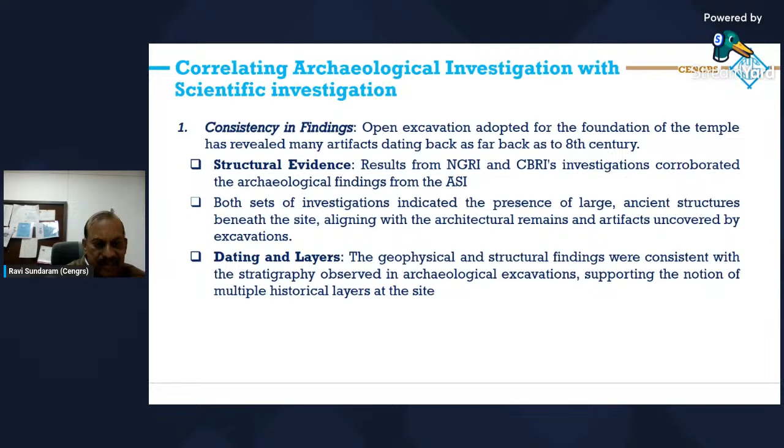The findings of the GPR and the resistivity surveys indicated the presence of extensive architectural remains beneath the site, with a lot of consistency in the findings. The structural evidence corroborated with the findings of ASI. Both sets of investigations indicated the presence of this large ancient structure, and the dating of these layers was also consistent.

The architectural features and structural remains, both scientific and archaeological, suggested various architectural elements for a large structure. These correlations reinforced the hypothesis that the site was home to a large temple-like structure before the construction of the Babri Masjid. The findings from the resistivity profiles and GPR were all consistent. The design elements also supported this, in line with the carvings and archaeological fragments identified. So all the scientific investigations provided this additional layer.

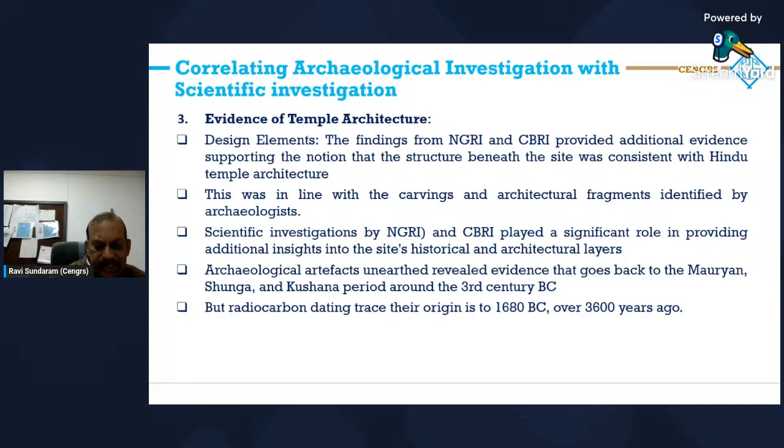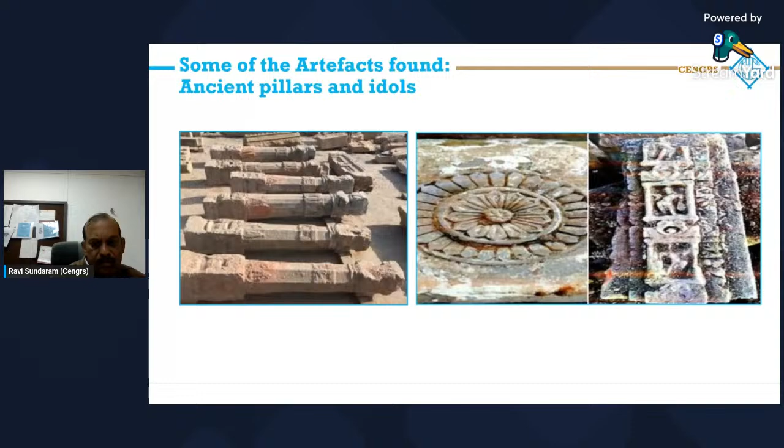Archaeological artifacts unearthed go back to the Mauryan, Shunga, and Kushana periods of the 3rd century BC, but some radiocarbon dating traces their origins to 1680 BC, over 3,600 years ago. These are some of the artifacts found - ancient pillars and idols, more pillars, motifs, and you can see the lotus carvings and also some idols and terracotta pieces.

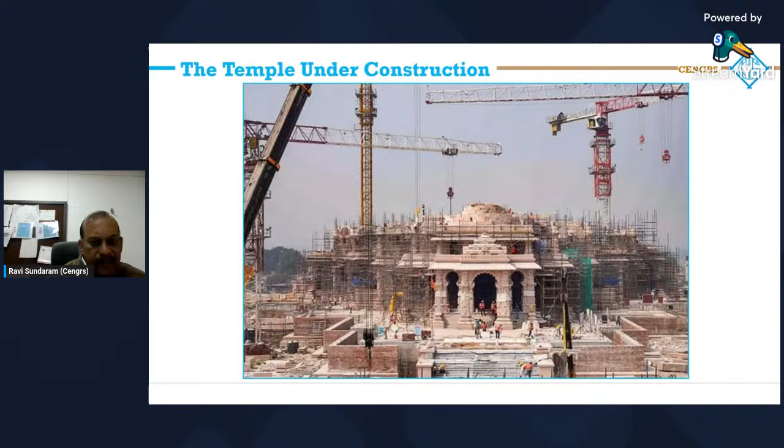I would now like to conclude. Shri Ram Janmabhoomi Temple at Ayodhya is a modern engineering marvel designed to withstand earthquakes as well as intense flooding. The foundation construction of the temple was done by Larsen and Toubro with design consultancy by Tata Consulting Engineers. The final selected scheme, developed with innovative construction techniques after meticulous planning, included excavation to 12-meter depth, engineering fill with roller compacted concrete.

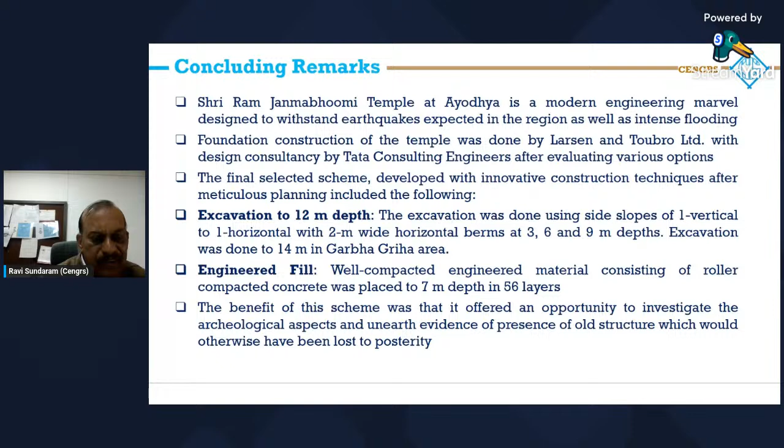It was placed in 56 layers. The benefit of the scheme was that it provided an opportunity to investigate the archaeological aspects and unearth evidence of the presence of the old structure, which would otherwise have been lost to posterity. Thank you very much for your kind attention. I will be happy to take any more questions. Thank you.

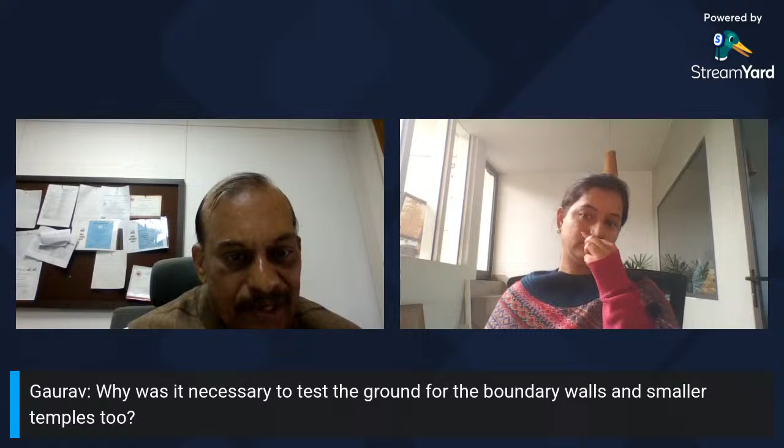This boundary wall was also a very heavy structure with quite a lot of loading. It was quite a wide facility. A pradakshina was planned here, so that people can walk around the temple. So this is not an ordinary boundary wall that you see for most buildings.

Also, these small temples had quite a bit of load. They were transferring a lot of load below the ground, and again with no steel, it makes you have to be thorough.